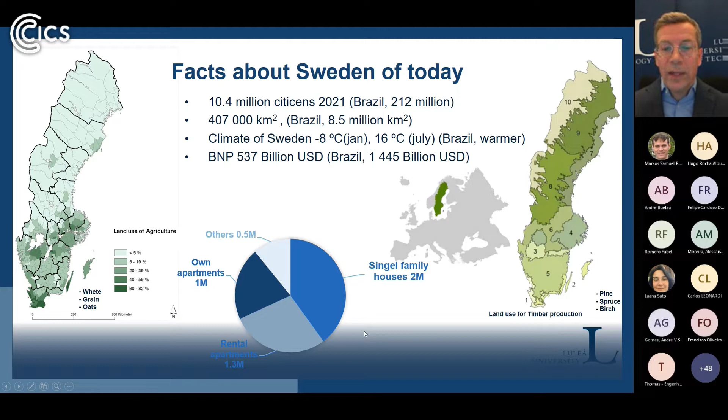Djurgården is one island in the middle where you also have ABBA. You know, most of us know and maybe like ABBA, and the ABBA museum is there. There's also an old ship there, called the Vasa Museum, another museum. You can visit that one, surrounded by a lot of parks.

He ordered it from an architect, Fredrik Blom. And Fredrik Blom was famous because he made prefabricated homes that could be moved between towns. So we can say he was a pioneer of modular construction in Sweden.

So we go on, and in that time, in the beginning of the 19th century, from 1800 until 1850, Sweden was one of the poorest countries in Europe. We had kings that liked to wage war with our neighbors around us. It was the Russians, it was the Danish people, and it was even our best friends in Finland and Norway. So we were so poor in the beginning of the 1800s, around 2.3 million.

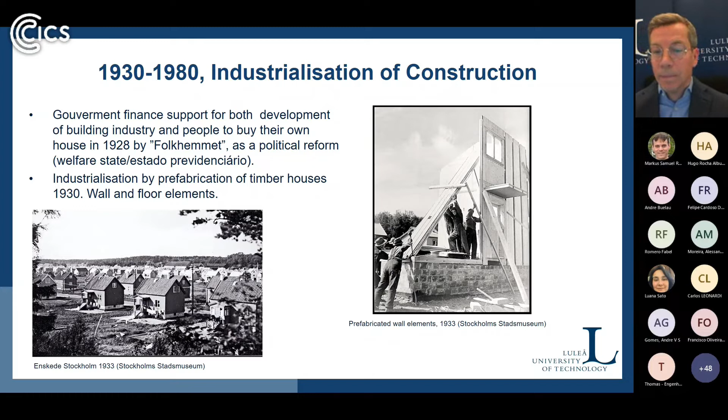The next step that was important was in the 60s. It was 1965 and 10 years from that. 100,000 homes were decided to be built per year, because we had a problem with not reaching that standard with running warm and hot water, and we didn't have toilets in every home. We had to go outside and do that.

Of course, there was a backside of that. It became areas that were not that popular, in case they were not planned so well. But a lot of those areas were really good, well done, for organizing new living for the people in Sweden.

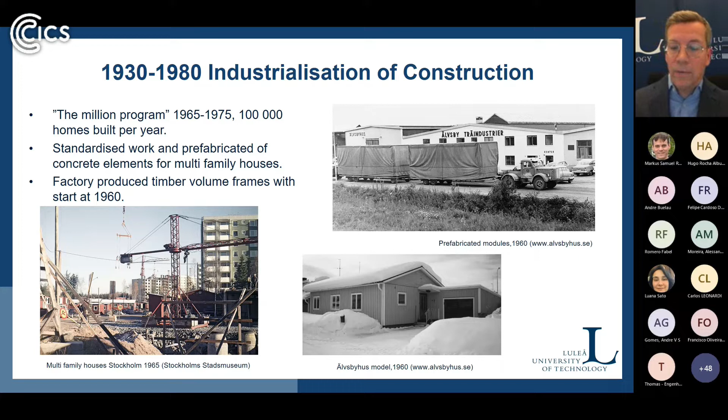So here you see this type of house in 1960, Älvsbyhus, the one with a small garage connected to it. That was a cheap house to build, to buy, and many people did that in Sweden. So Älvsbyhus was a pioneer for volumetric modular production. And today 95% of single family houses are prefabricated timber structures.

And technically it's about 200 millimeter thick walls and about 300 millimeter roof insulation, which is the standard today to meet the climate conditions we have up here in the north, especially for the winter, but also for the summer to keep out the heat, so our energy use isn't so high.

And Älvsbyhus is one of the actors on the market, but they have a low range product, we can say. So this is the cheapest one you can have, because they don't have a slab on the ground. They have this concrete frame, and then they put their prefabricated volumetric module, which also has the floor in timber structure.

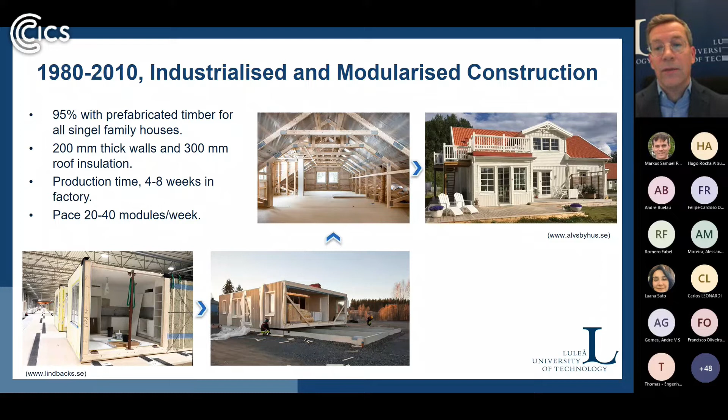And you see on the upper right the Älvsbyhus, a traditional one. They have an option with one part here on the roof that goes out. But that is quite traditional for how we live in Sweden in this type of timber single family house.

And that knowledge was taken over to multi-family houses in the 90s, when the fire regulation restriction was removed, so you could build more than 2 stories. That was really important, because then you can build as long as you have the sprinkler system, or boards that protect from fire. Then new developers started popping up, and Lindbäcks Bygg is one of them that I have studied a lot, and they started in 1992 to take advantage of that new regulation.

And for a factory producing this type of volumetric modules, it takes about 3 to 4 weeks for one project. And one project could be between, say, 150 or 200 volumetric modules, up to 400 or 500. And if you have 400 or 500 modules in the project, it takes maybe 7 or 8 weeks to do that, because you have a pace in your production.

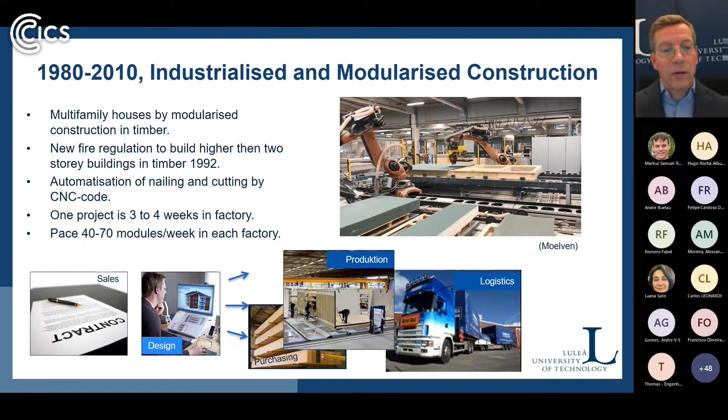So for the design phase, it is important to understand what you could predefine. And predefinition has been something that I have been really interested in. How can you lock parameters in your product platform? Scania is a really good example, which is well known for their modularization.

And they have decreased the number of components, press tools, to minimize the assembly lines and assembly time, and also maybe the inventory, but still have variants because of their interfaces and combining those modular objects. Of course, this is a totally different context compared to construction, and especially house building. So we have to see this with critical eyes on the modularization.

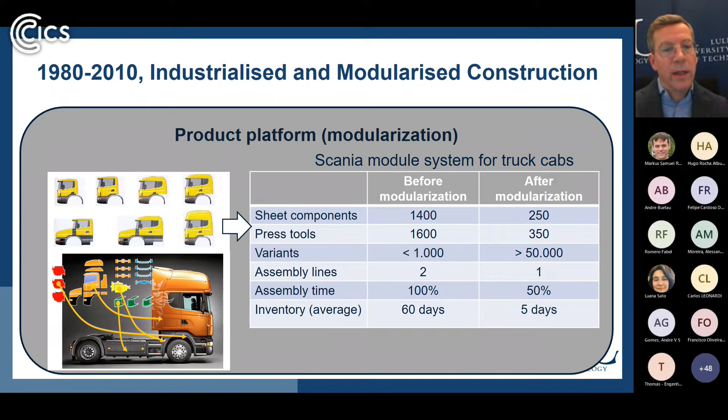But it is interesting to take knowledge from the other industry, how it could be used in our context. So the volumetric module is central for that. What we see here is 2 different applications, a module application and a modularity application. We have commonality, which is the locked part, and we have variable, that is flexible.

We start with the commonality that is locked, and I have zoomed in on the interface between the floor and the wall connection. And at the same time, it's also between two different modules on top of each other. Those interfaces have to be the same, so it's easy to assemble both in the factory and also on site.

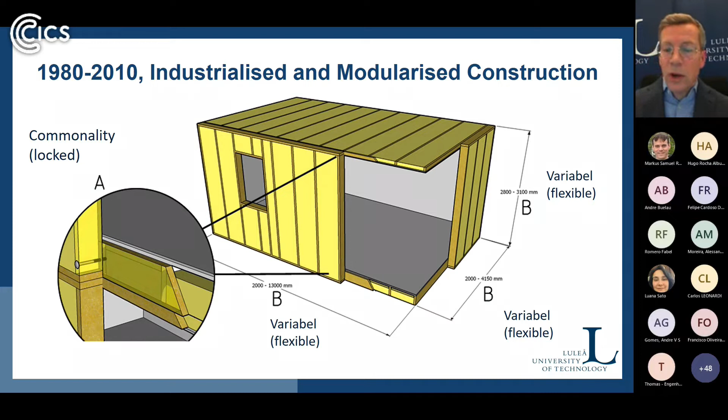But the flexibility in length, width, and height is important for the architect to meet customer needs and also city plan needs, making layouts that are usable for the function that you will have in an apartment. So I will show some examples of that usability.

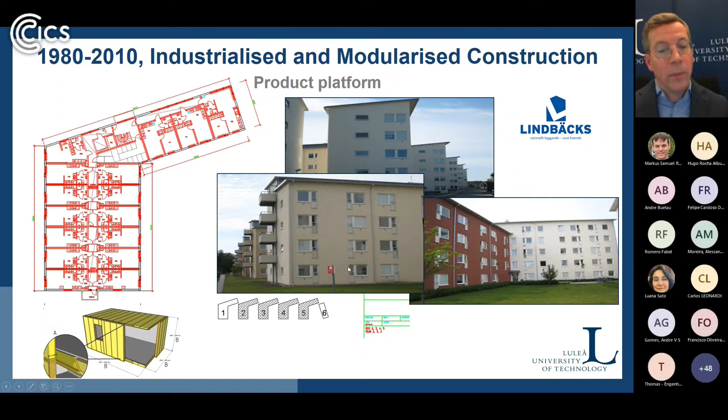Of course, it lacks maybe on the architectural values in some way. I don't think this house is so attractive, but it's a student apartment. It's good for living when you do your studies. And Lindbäcks have been quite good at developing this, and it becomes much cheaper to produce and also sell, and the client could buy it for a lower price because you have the repetition.

Here, another project. Here, the standard has to be a little bit higher. You see the staircase here in this picture, and you also see on the left part the facade with the windows is not a repetition. And here, the architect and also the end client and maybe the municipality like to show a nice house in the city center, so it does not look like it is standardized.

Here we have the windows running over the facade, we can call it, and a possibility to do that even if you use the same platform.

It's also important that as you get closer to the city center, the design has to fit the city plan. That's why it's important to have flexible modules, rather than standardized houses or modules that only fit a specific plot of an area. We can see the layout here, also in this case.

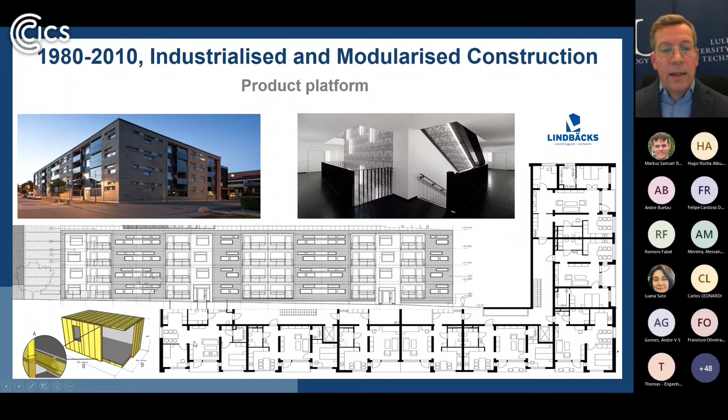There isn't much repetition of those modules. We have maybe some mirrored ones here, and maybe some repetition, but these are mostly unique modules for the entire project. Of course there could be repetition in height, and we know the windows are identical, but it fits the production in the factory. You just need to know from the data in your BIM model what should be done for each specific object, and that's important.

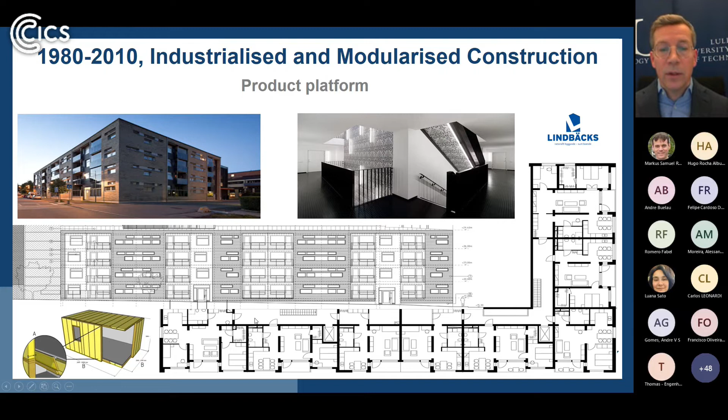Here is another one: BoKlok. BoKlok is a combination of Ikea - maybe you're familiar with Ikea, where you can buy furniture - and Skanska, a construction company in Scandinavia and also in the US. They combined their businesses and developed this concept.

Here they have another approach. They have locked their modules into 8 different types - you see them at the bottom here. You have 8 different modules that are locked, and you can combine them in various configurations to get apartments. Those blocks can be combined into a longer building for housing, developed with balconies and also an outer corridor, as we see here.

This is the same thinking we had both in the 30s and in the 60s for low cost products, where a single mother with her child could afford to buy this type because it's low cost, but it's full standard with Ikea furniture inside, which is affordable in that case. So that's a product focused on low cost, but with good values, like a garden and so on.

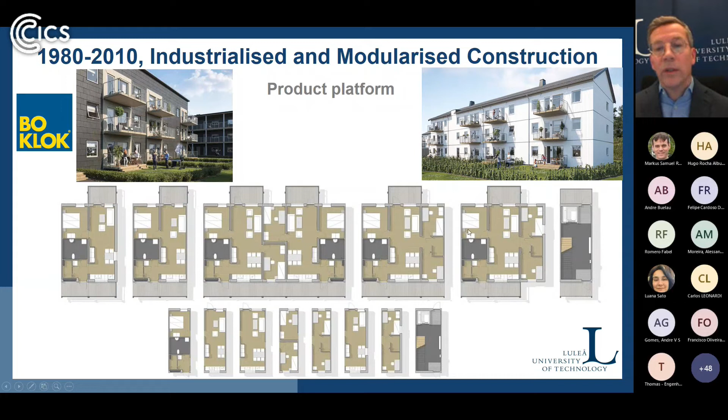As I said earlier, the design phase is critical, and I started to study Lindbäcks, which is an industrialized house builder in Sweden. Beda has been there and seen their production. I have done a lot of studies of the design process, because it's really interesting to see how they can improve it.

Improve the support of the design phase before production, because the production pace has increased steady state over a number of years. In that design phase, you have to communicate a lot of information between the client and the contractor, and between different actors, so you cannot push it to be too short. It needs to be handled quite widely, so you need a number of parallel projects in the design phase because the production time is so short.

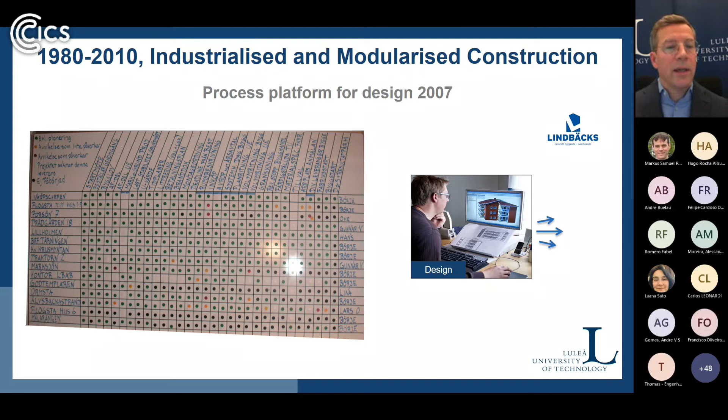This was about the activities studied in 2007. The green ones were a magnet on a magnet board that was according to plan, yellow was not following plan, and red was urgent, an alert that you had to do something about. That was the beginning, and I saw that it's not enough - you cannot see the progress of how things are happening by only those three colors.

So I studied and interviewed people in the design organization to understand what type of activities are made in the design process, what task each type of activity has, and what deliveries are made from it. About 100 activities were identified with a number of task lists for each, and that was mapped up as, you could say, a countdown.

You see that from the top, almost the top, is 20, 19, 18, 17, 16, going to the right - that's the number of weeks before production starts in the factory. So they know: here I will do this activity and make this delivery. By that they know, and they have some small tolerances of 2-3 weeks just before production to handle those variations. But it was important not to have too much variance. That was one way to manage the progress of the design activities.

This was in 2010 how it looked, and the colors represented different disciplines in that one.

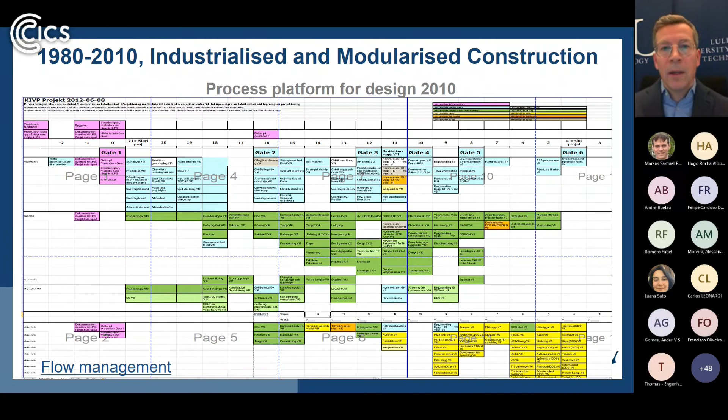Each board in this room, this was the control room. They had these boards around their walls, and they could control and go in there from the beginning weekly, but then it became daily control to see the progress. How are we doing? Are we following the schedule?

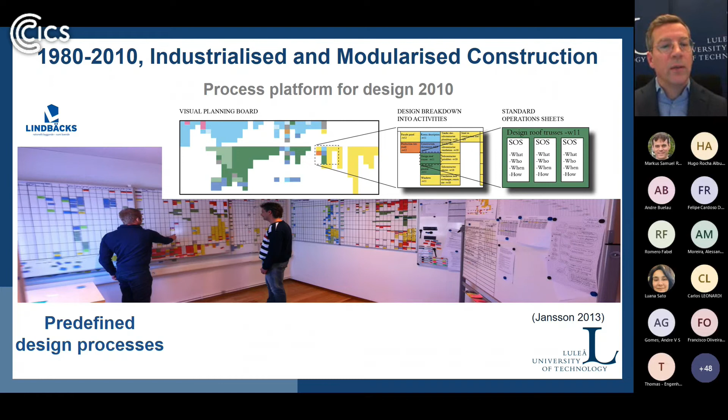And you see the breakdown up to this colored one, from a phase now to some activities, and activities down to task - what, who, when, do, and how do we do those. They called these standard operation sheets to describe those tasks. This was in a manual way, only for the design. It was not transferable to site or to the factory, and it was isolated to the design organization.

Now we come over to 2010 until today, the digitalization for modularized construction. In 2016, they transformed these magnetic boards to a digital version to manage those projects by digital tools, by touch screens, so you can show that for each project and communicate with other people that were at a distance, on site, or somewhere else. And you could choose between a number of projects, because the digitalization is more flexible for that.

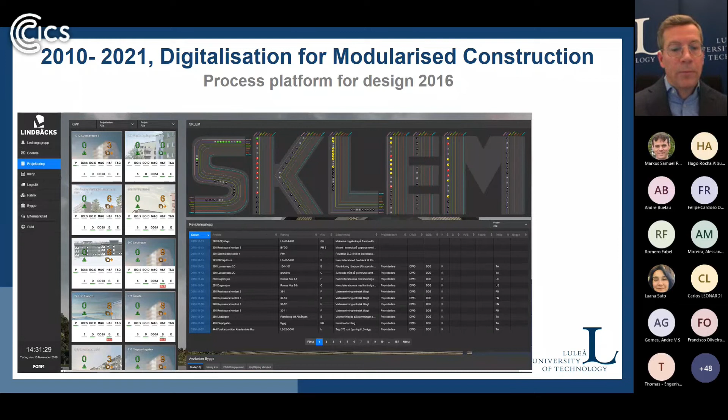And they also built in S for safety, K for quality, and so on for logistics and for engineering and management of everything. This was something that was developed in those years. And here you see the magnetic board in digital version in the same way.

What do they do in design then? They have to create information for production. And we saw when we studied that drawings were not a good way to deliver information to production. We need to use the BIM model in a better way. They have used it for files for the robot, but not much else. They use them for CNC codes for cutting and nailing robots and so on, but not for information on in which order materials should be supporting the main flow in production.

But the ID and the information for each object were not at that level in the CAD software. So we saw that we could use some algorithms to put in data so they know where they are.

I'll give an example. We see a stud here, vertical studs in this drawing. It belongs to something - yes, it belongs to the wall. The stud belongs to the wall, and the wall belongs to the volumetric module, and the volumetric module belongs to a floor level, and a floor level belongs to a building, and the building belongs to a project. That is one hierarchical level of identification of relation between objects, and that is really important as metadata for an object.

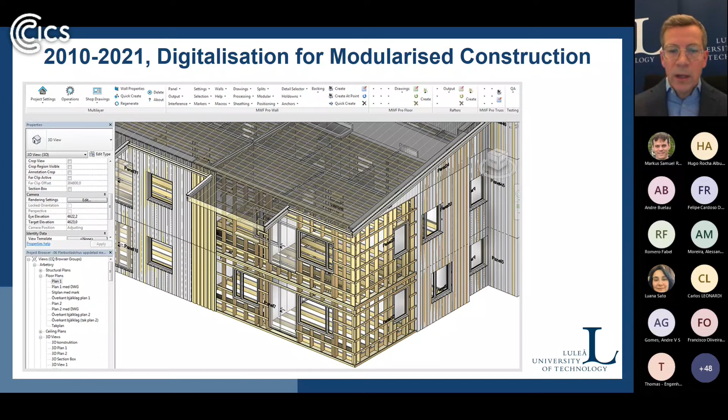So you can automate the sequence process for production. I will demonstrate that with this video.

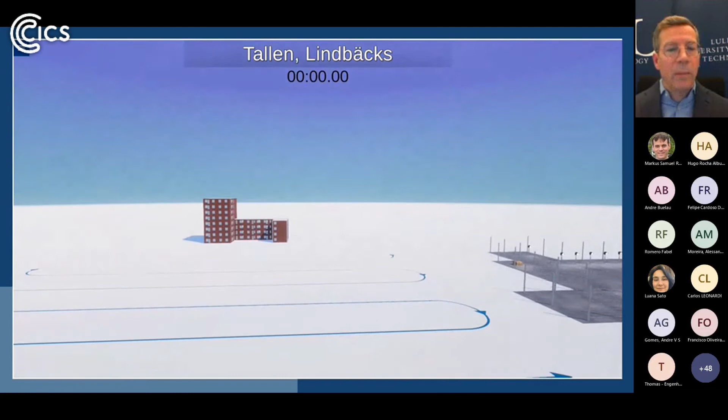We are now inside the BIM model. It's built up of these modules. We see an apartment part, and now we're backing off, and here you see the whole building - no facade, no balconies, and no roof. Quite ugly, but it explains.

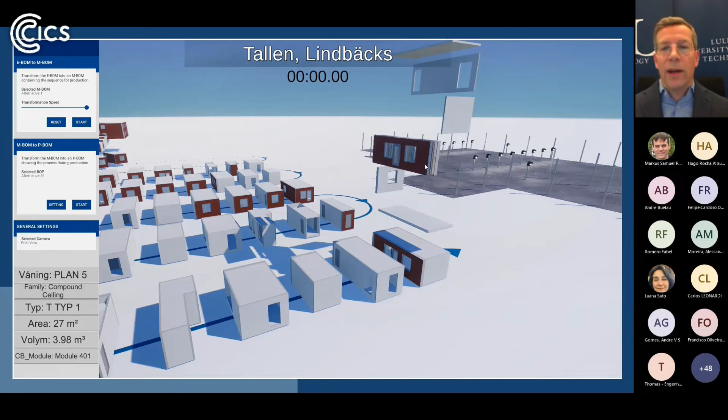Here we go from engineering view to a manufacturing sequence view. By automation, it knows where I am on the first level - I will be the first one put out in the sequence of production on a module level. We also see that on an element level, if you say the wall element or the floor element, and also on the combination of components - so which order each component should be produced, according to a specific element and to a specific module.

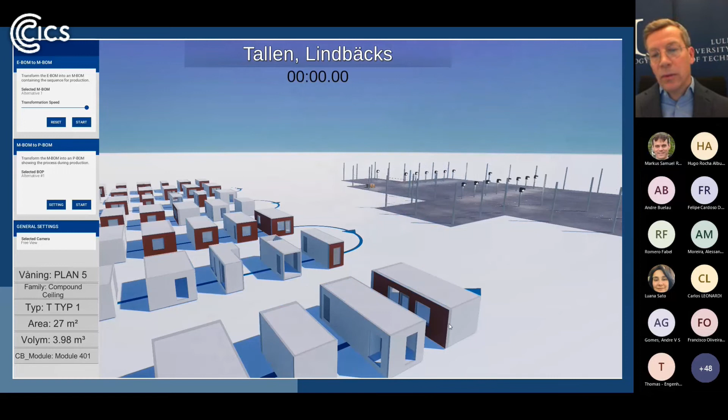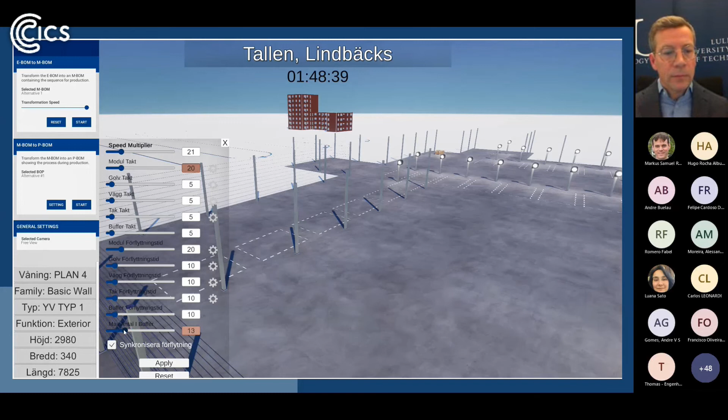By putting in that information through automation, it was possible to simulate the different flows in the factory. Here we have put in some parameters for how to simulate those flows. We have the speed for how we should look at the visualization, and we have a buffer - how much buffer there should be for the wall elements, because they were maybe working too fast sometimes compared to the other stations, and we can regulate that.

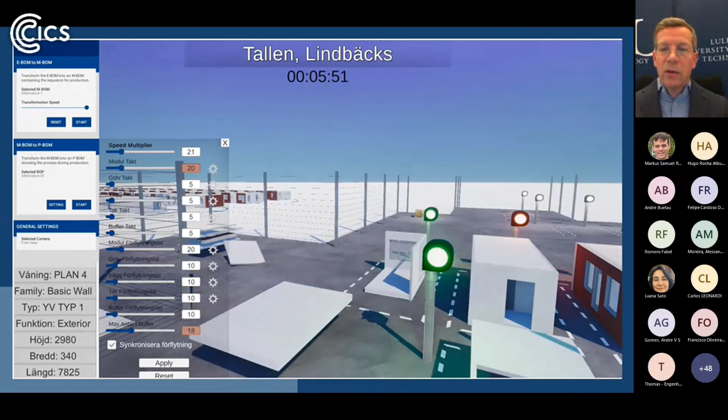Now we see we have the wall elements in the middle, the floor elements to the left, and the roof elements to the right. We see the buffer to the left, and we also see those signs with green and red in front, and that is when it's working time at that station. Now it's moving, now working, and then they stop working.

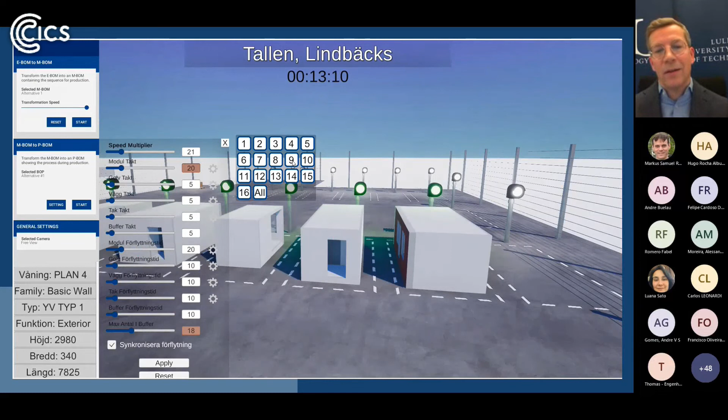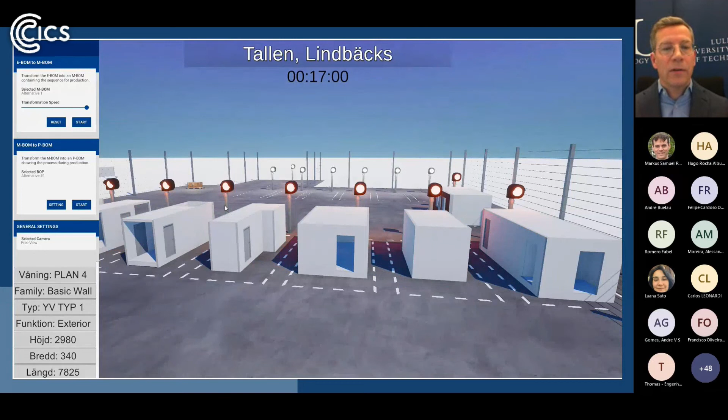Now we have synchronized the movement in that case, but we can also do it individually, putting in parameters individually for each station. By doing that, you can configure the whole flow in the factory from a perspective of takt time and buffers. That was quite valuable for the industrialized house companies in that project.

We had eight modularized construction companies in that project. We did the simulation. You also see the metadata to the left, a little bit about the BIM data that is showing.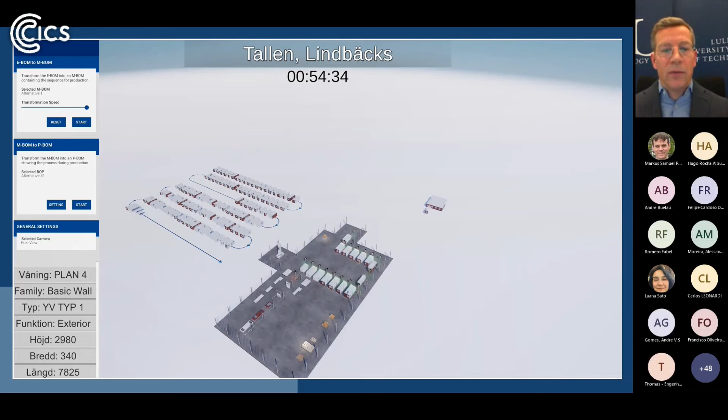We visualized this in a virtual reality environment called Unity. We have also tested this in Unreal because it's powerful to see what's happening, not just data sheets showing numbers. It's really important to understand from a factory production perspective how this could be simulated. Virtual reality has good possibility because it's not locked like a CAD or BIM software with limited functionality. Virtual reality has full freedom for programming numbers of functions.

Here are some more future directions of modularized construction. We have for the last year focused a lot on generative design. Some of you maybe don't know what generative design is, but it's a bit about generating new solutions or shapes. Facades have been quite popular in architecture. We are focused on applying this to modularized construction for the modules themselves.

Here we see parameters that are the base for the generative design. We are in Grasshopper and Rhino, and this time we have also tested Grasshopper and Revit, but it works on different parts. Then we generate, and you see quite ugly solutions come out. So you have to narrow down your parameters and restrictions to get better solutions for your generative design. And here you see it comes to one solution, and then you use some type of platform.

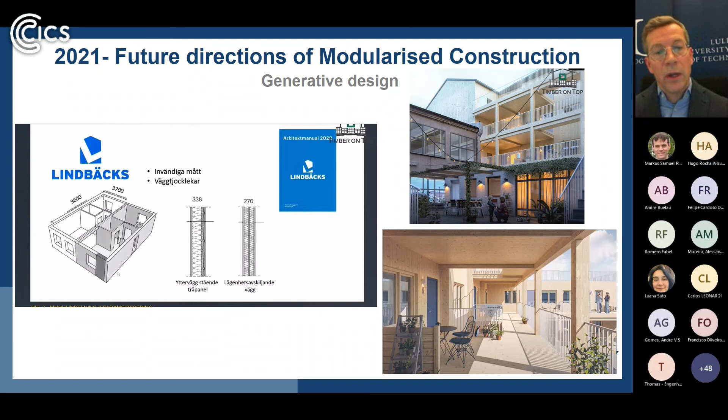In this case, Lindbäcks. This was a student project. They took Lindbäcks and generated layouts according to their system, then optimized the layout, which produced this solution. What we see is 3 floors, done on top of another existing building on the right side. So it's 3 floors on top of an existing building, with some rendering of the outer corridor. The student project covered both generative design and visualization, and the visualization here was done in Blender.

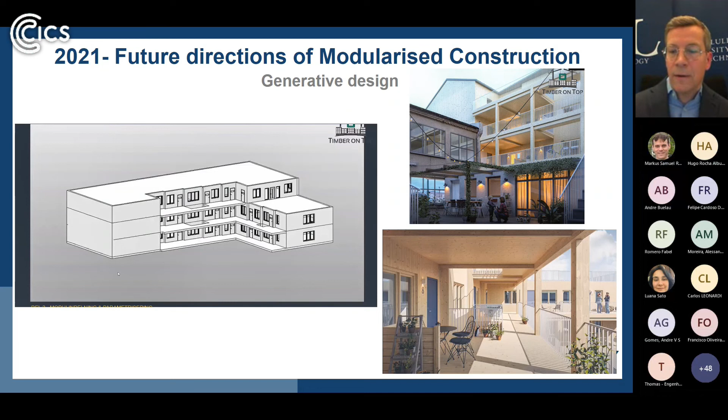Another, and this is the last future direction I will present: how we can generate work instructions for site work by machine learning. On the left side you see the process. We have studied BoKlok in this case, the process of assembling roof cassettes - roof cassette montage and also gable montage - but the focus is on the roof cassette montage in this video.

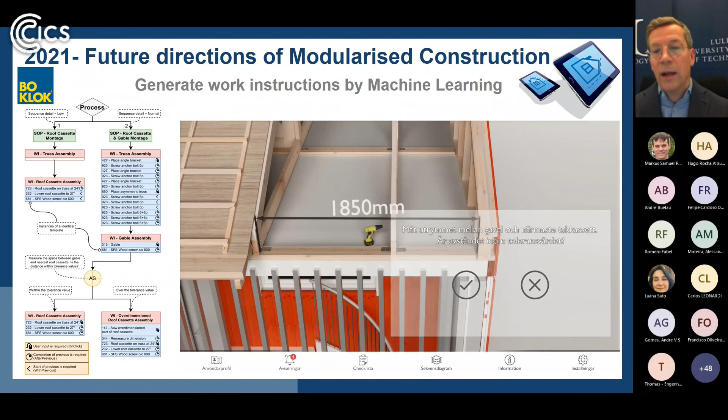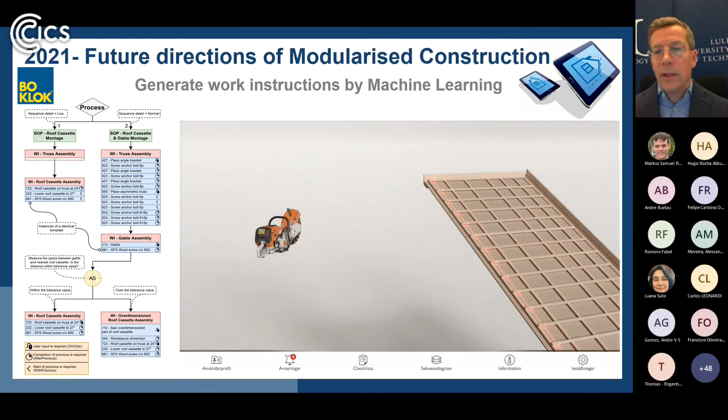The instruction is hard to read when you see this type of lines - first you do that. Of course that could be interesting, but it's more useful to show this together with visualization. Here in Sweden you see a roof, with roof trusses and some roof cassettes already put in place. The last one has to be cut because it doesn't fit the standard difference, so you put a mark on it, measure out how far it will be, and then cut it. This is a description in the virtual environment.

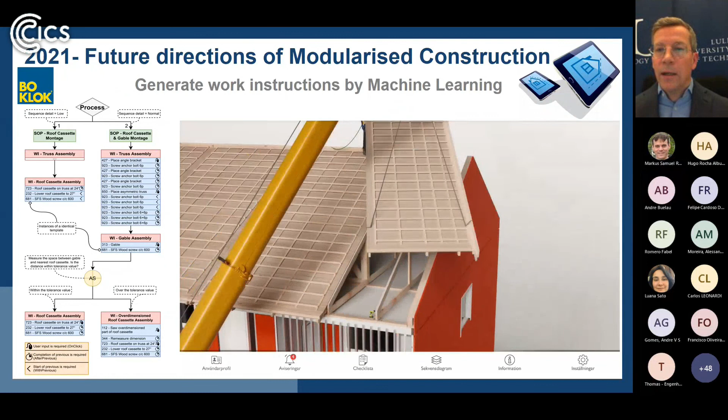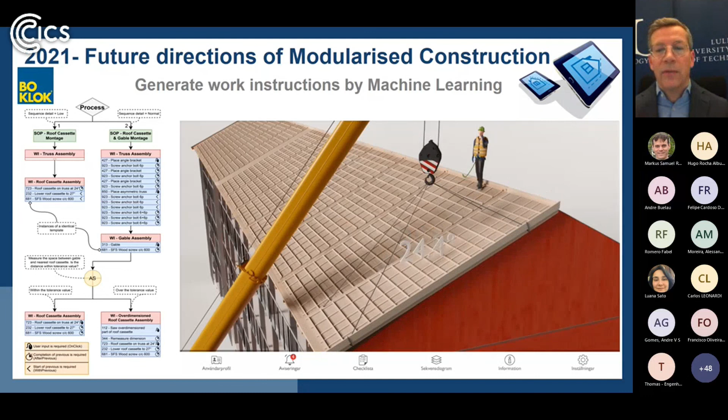It's presented by AR app on a mobile phone or tablet that you can have on site, showing the assembly of the roof cassettes, starting at the top, putting it down to the right angle, and fastening it to the trusses.

The machine learning part is really interesting because modularized construction companies have done a number of projects before, and they can use that data for how they assembled things on site and learn from it, with the computer working out the best solution based on history. Then, through generative design, it could take advantage of designing the best way of doing it, giving more solutions than the human brain alone could suggest. So you have the power of both your brain and what the computer can handle. This is not a sequential assembly in one way - you have different directions and a backbone of different schemas in that case.